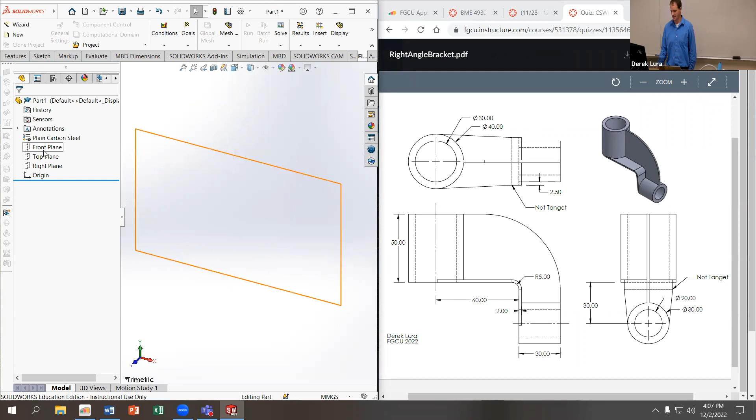I'm going to start on the top plane and draw this geometry I had here for the top circle, making that my origin for convenience. I'm setting that as an outer diameter of 40 millimeters. I'm not going to do the hole yet because I know I'm going to add ribs and things to this, so I'll wait and do the holes towards the end. I could add them now, but I'm worried that could cause issues as I add more geometry. So I'm giving that a diameter of 40 and a height of 50.

In a problem like this, I'm not going to use a midpoint extrude because I have other things coming off the bottom of this. If I make this the bottom of my cylinder, it's easier to get that 30 millimeter offset off of it, since I'm not dividing the 50 in half. So this is one of the examples where we're not using that midpoint extrude - can save some time actually.

This cylinder coming off to the right, I want to draw that next. So I'll go to the right plane and sketch that. The reason I'm drawing this next is because I want to connect these two bodies with these thin walled parts, so I need both in place to do that. Let's do just the outer diameter again - I'll say it has an outer diameter of 30 millimeters, and it also has a height from the bottom of my previous cylinder of 30 millimeters, conveniently.

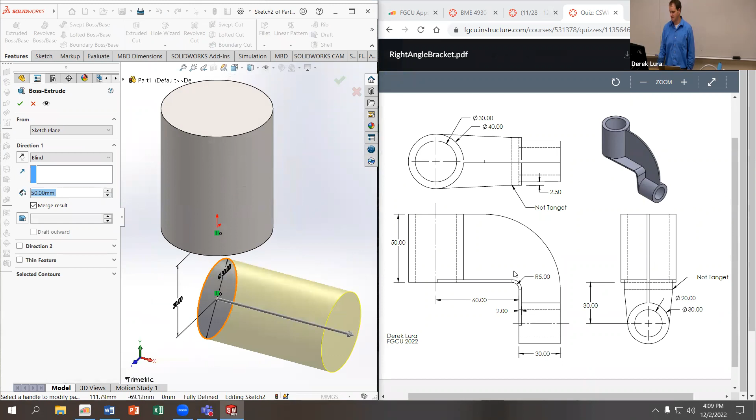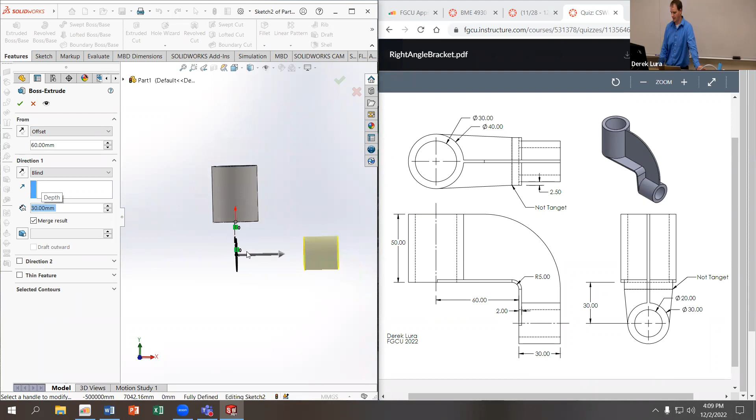It doesn't say it, but I'm going to assume the origin here is vertical below the origin of my part, since it looks like it is and that seems reasonable. I'm going to extrude that. Again, I didn't do this on an offset reference plane, just to save time. So I'm offsetting the start of this cylinder so it's 60 millimeters from the center of my original cylinder, which was on the origin of my part, so that comes out fairly easily. Again it has a height of 30, so all 30s down here on this first starting point. Having those consistent measurements is helpful as well - maybe that's a global variable inside a more realistic part design.

Now let's start adding my ribs. This is kind of the hard part, getting the geometry where this rib tapers out. I'm going to do it the lazy way, starting by drawing the edge of the rib. I think I might get that last one there - oh sorry. I have good/bad habits of using hotkeys, so that's my escape hotkey again. So I make that collinear, and I'll put this point on the end of that line.

We're told that has a radius of 5 millimeters, so I'm giving it a radius of 5 millimeters. Again, I'm extending this out past the edge of my part because I know I'll have to trim it down using some tangent relations. I know the edge doesn't actually go past the center line on this top point, so maybe it makes more sense to have this point only go to the center point, just to have a little less extra geometry. But I'm going to overextend it.

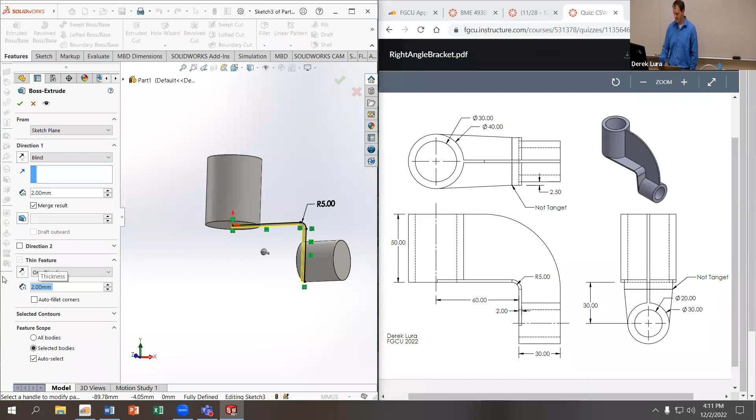So I'm going to extrude this out, and it's going to have a thickness of 2 millimeters here. I do want it to go up into the part, not down out, just because of the way it is on my drawing. And then for the width, I want it to be as wide as the widest thing in my part, so I'm going to use a mid plane and give it a distance of 40, which is the width of that top cylinder. That looks okay, so I'll accept that.

Now I'm going to start doing my cuts. I'll go to my top plane and draw the cutout for this part. I'm coming across over - actually this goes up to this edge here, so let me redraw that. I'm going to go from this point up to here and then across and down. I do need to include a little bit of this section of the circle, so I'm going to have this come off of that part.

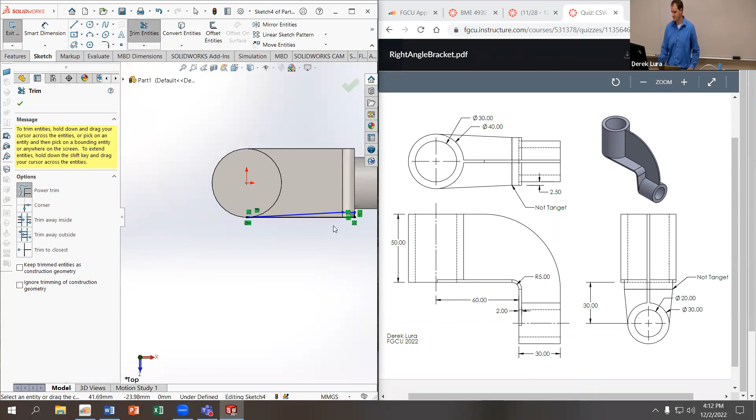I'm going to convert this circle, make this tangent to the circle, and then make this tangent as well. I'm just going to zoom in on this and trim away the excess. This is kind of hard to see, but I do have a little bit of an arc right there. I know I have that arc because if you look at this drawing, this rib doesn't go all the way to the center line on that circle. I'm given that the offset between the side of this circle on the bottom and this edge is 2.5 millimeters.

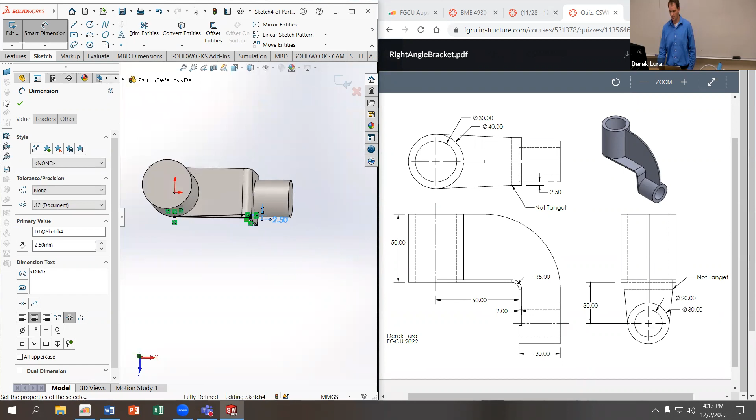So this is going to give me the cutout that I want. I'm going to do features, extrude and cut, through all in both directions, and that should cut out that side. And it gives me that nice offset that I wanted there.

A little bit complicated, but it gives me the geometry that I want. I'm going to do almost exactly the same thing from the right plane for this other circle. I'm going to convert this circle, then draw my triangle coming out to this tangent one. This one's actually going to go out past the horizontal line, so be careful you don't get that horizontal relation, because that'll prevent you from getting the tangent relation you want.

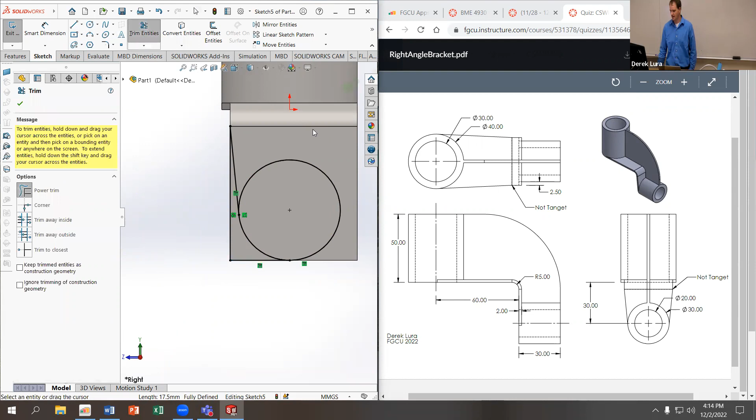Then I'm going to convert these side edges as well, just so I don't have to put in any dimensions, and then trim out the excess portion of the circle. That should give me a closed geometry. So I'll extrude cut that out. Since this starts all the way out on one side, I don't have to go through all in both directions, just one direction is fine. And that gives me the bottom portion of that.

I'm going to take those two and try to mirror them about my front plane to get the other half of it. Hopefully that'll work fine. That looks pretty good. I'll go ahead and add the center cutouts to these.

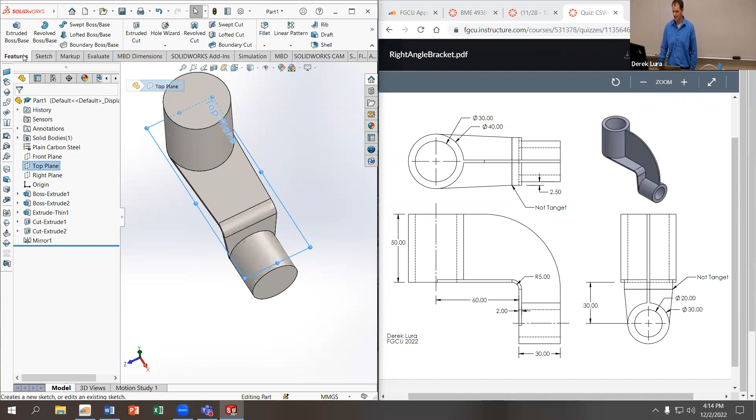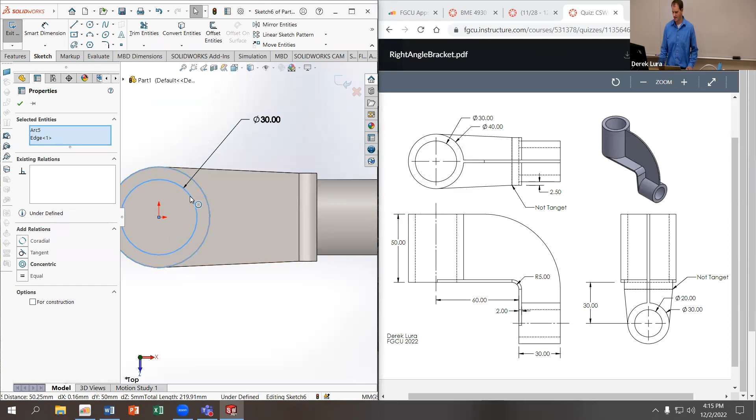So I'll sketch on the top plane, and I'm just going to do an offset, reverse it. I'm doing that just to get the relation that I want. I guess, go. This is not worth doing, so let's make a concentric after the fact. I was just trying to be quick about getting any circle of the size that I wanted.

Extrude cut through all, make sure it's going in the right direction. Do the same thing down here. I can go to the right plane, or I can go to the edge face in here. Let's do it on the edge there.

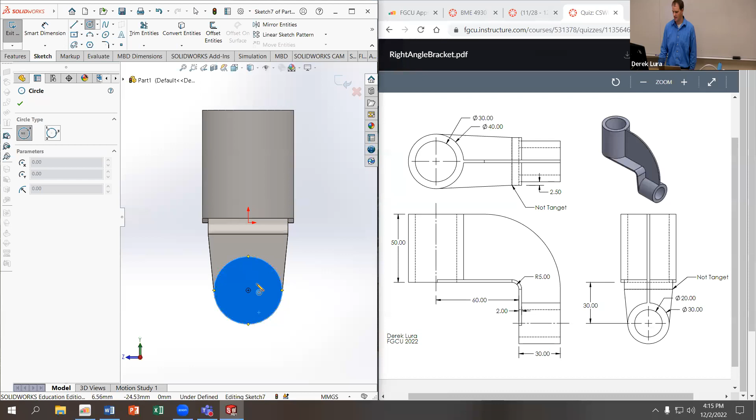This one I'm pretty sure is going to be fine. I'll hover over the edge trying to get the center constraint. That works out pretty well, and I'll give it a diameter of 20. Then extrude cut it, and I'll do through all.

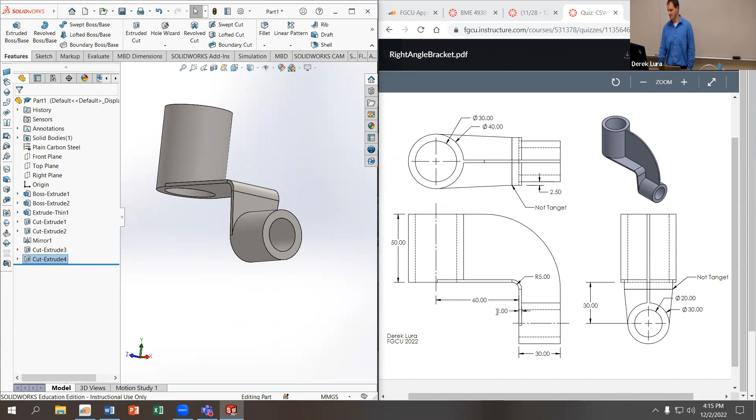And the last thing is this top ridge going across the top. I'm going to assume it's 2, so this is the width of the bottom edge. To get that, I'm going to use a rib. So I'm going to start with the line coming across here.

I want to have a tangent arc. Tangent arc, there we go, down to here. And I want this other line, and I want that to be vertical and tangent. So let's add vertical and tangent. Go - that's a little underdefined.

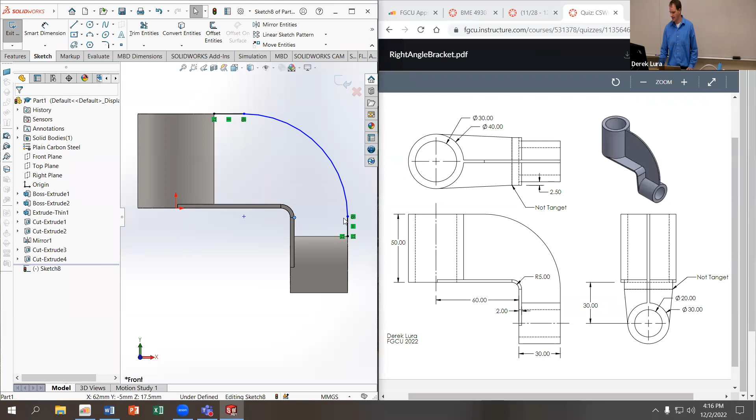I'm just going to assume that this arc here and this arc are the same length. So I'm going to put the center of this one horizontally aligned with this endpoint here. Which again, that probably should have been somewhere in the notes, or at least a center point mark. I didn't modify the drawing on this as I was waiting for you guys to work on it.

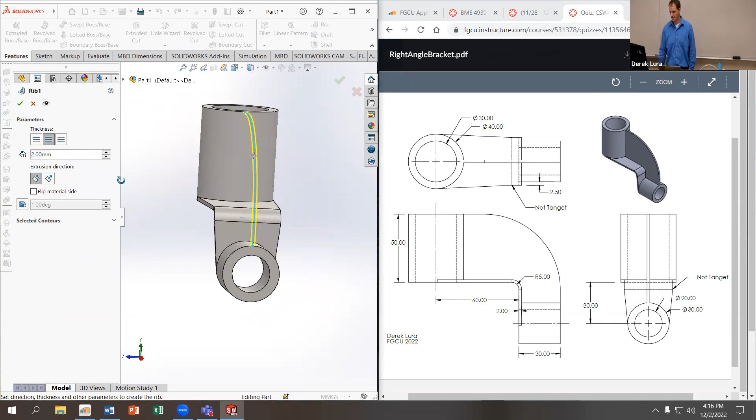To try and give that relation. With that arc drawn, I can exit that sketch, go into the rib tool, give it a thickness of 2 millimeters, and mid-plane looks fine, direction looks fine, so I'll accept that. The big advantage of using the rib tool there is that I don't have to worry about overlap between my extrude and this part. I also don't have to draw the bottom half or convert that bottom entity to get the other side of that. So that works out pretty well.